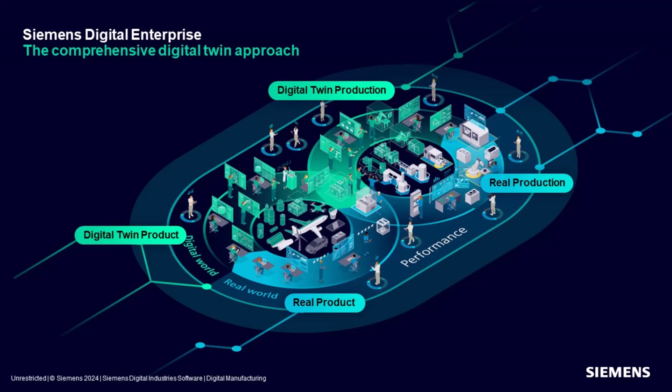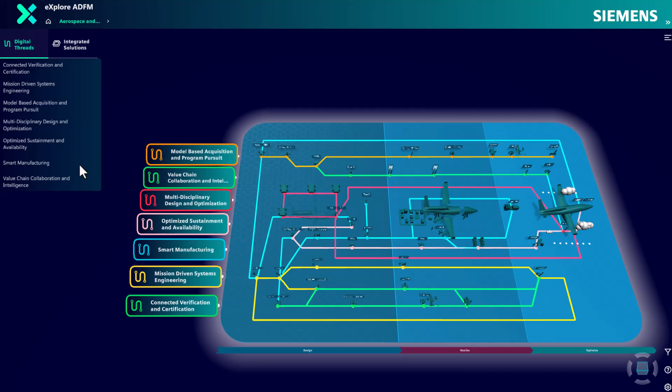For aerospace and defense, we have 7 digital threads with prescriptive business processes to help guide you through your digital transformation. Out of those 7 digital threads, we will be focusing today on the smart manufacturing one, mostly spending time on the front end and the design phase, around preliminary production planning and production process development.

Traditionally, engineering and manufacturing planning happens almost sequentially. Now they happen concurrently during this phase, and you are shifting your manufacturing planning to the left, where you can quickly explore and optimize alternative manufacturing methods, cost, and feasibility.

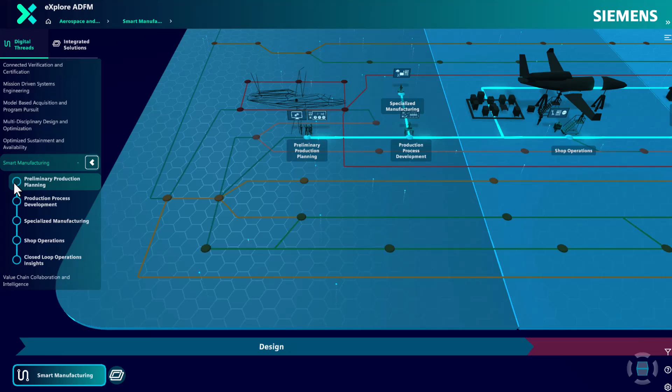In the first step, preliminary production planning, this is where you mitigate manufacturing risk in the conceptual phase by identifying and addressing issues early in collaboration with engineering.

At the end of this step, you have an idea of the overall manufacturing breakdown, which is the high-level manufacturing bill of material, as well as the high-level process breakdown, the bill of process. You also have an idea of the facility and the machines you'll need and the sourcing strategy.

As we move into the second step, production process development, as the design matures, you now detail out the process, evaluate it, and update it virtually. Once you're satisfied with the manufacturing plan, you can leverage that plan to support production through virtual commissioning.

But also robust integrations to downstream execution systems used to support production. At the end, you have a fully validated and detailed bill of process containing all the information you need to build the product. That includes operations, tools, equipment, skills, work area, work instructions, data to collect, etc.

The digital twin of the production process contains several elements. First, you are able to use the engineering data definition, the engineering bill of materials, alongside the 3D models, in order to create a manufacturing representation of it, or a manufacturing bill of material.

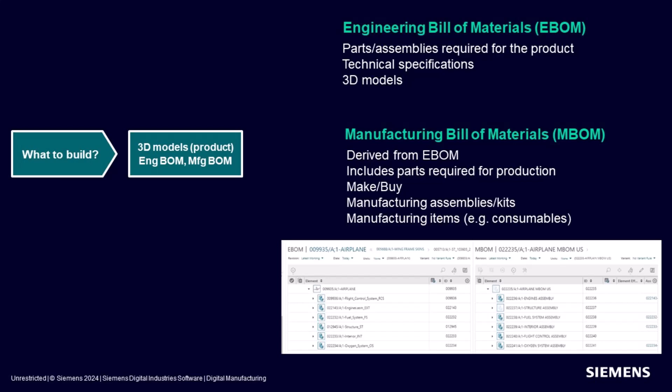Second aspect, you are able to use engineering requirements on the 3D models to define inspections, which then are being used to define inspection operations.

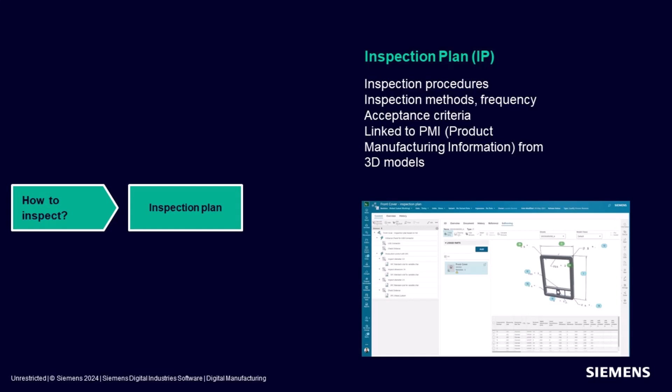The third element is the bill of equipment, which contains the plant structure, the tools, the equipment that you have, alongside the 3D models for those.

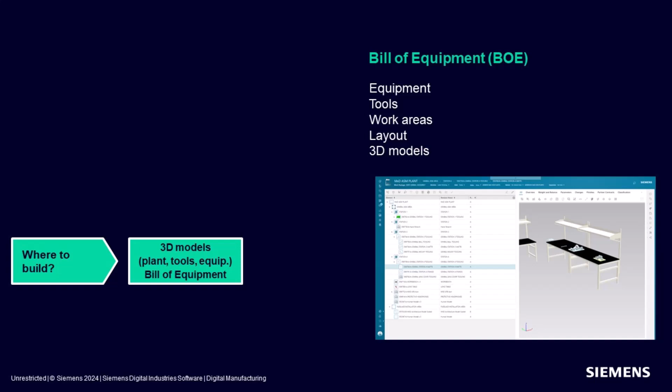All of these 3 elements feed into the bill of process, which will have all you need to support production: the order of operations, the parts you need, the tools you need, where you're going to build it, work instructions, supporting elements, including 3D models, etc.

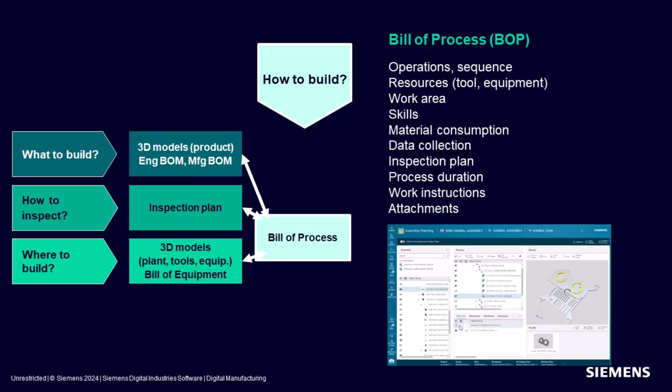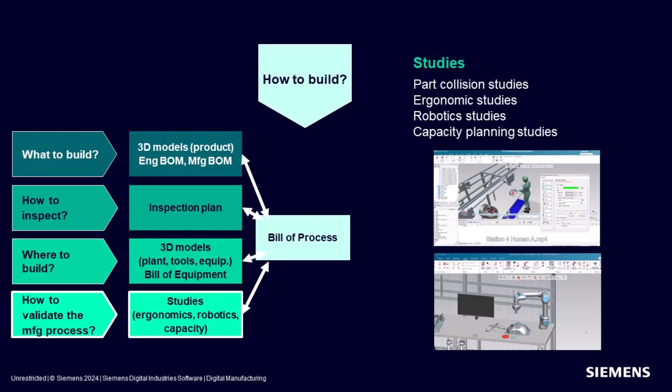All this information is constantly refined by simulating it and validating it through extensive simulations, which you have seen in previous webinars. Once all that information is ready to go and you have validated it, you are able to leverage that information to support the downstream systems.

All this information is authored, maintained and developed in EasyPlan. That's what you're seeing here. For an example, you're seeing on the left-hand side the bill of equipment first, which is where you're going to be building with a hierarchy of assets.

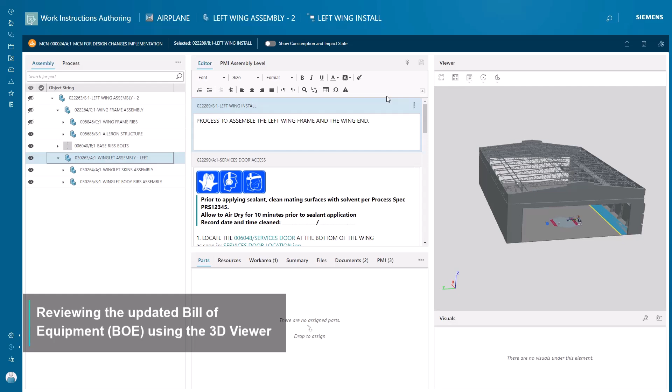You see the manufacturing bill of materials, which is what you're going to build. All this information then gets into the bill of process, what you see on the left-hand side, which is all the operations you need in order to build this assembly.

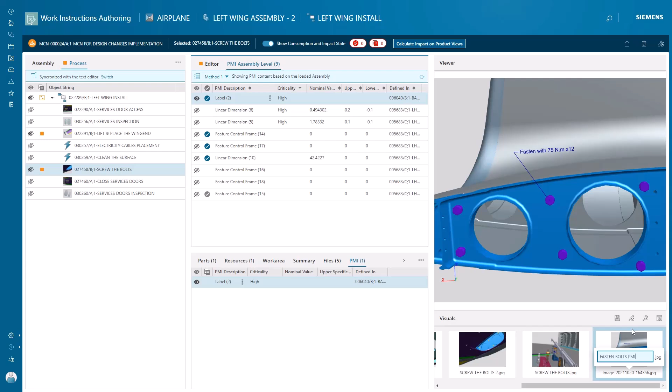But it's not just a sequence of operations, it's all the rich information around it. It could be textual work instructions. It's making sure you call out for the right parts directly in the systems.

It's making sure you can have 3D representations as well, and that you can call out the right attachments within the work instructions if applicable. All of this is created and maintained in EasyPlan and can also be used to support simulations, as you've seen in previous seminars.

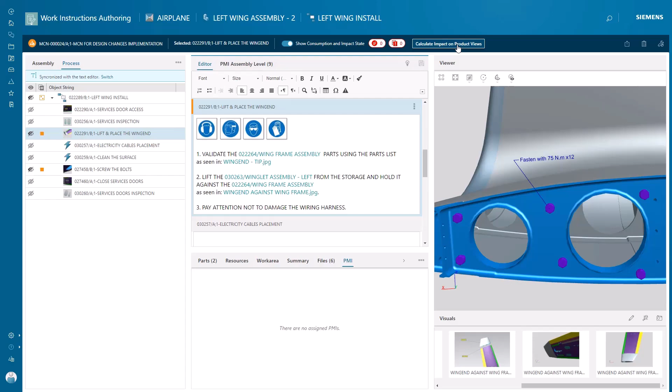Last thing I want to share is how we take that information and use it for downstream execution. As you can see here, a different bill of process, and we're going to use our out-of-the-box integration to get that information into ERP, in that case SAP, but also in our MES system, Opcenter.

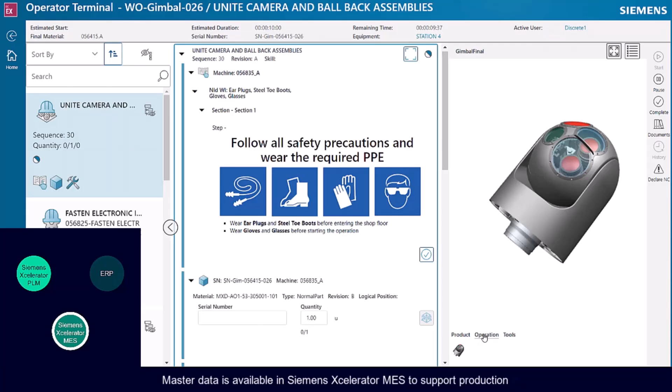So that when it comes to support the shop floor execution, all the same information that was authored and validated is now available at the fingertips of the operator to support day-to-day operation.

As a summary, with that connected digital twin that allows you to develop the plan, tied to engineering data, tied to extensive simulation tools to help identify issues very early and address them virtually, you are able to minimize risk before the product gets put together, and increase your first time delivery of that information on the shop floor, overall increasing efficiency and optimizing production.